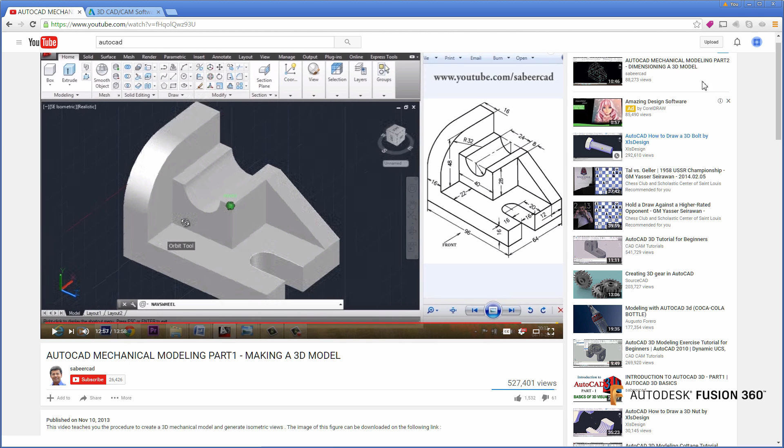So this is going to be a really nice apples to apples workflow of what you're probably familiar with if you're doing 3D AutoCAD right now, and then jumping back and creating it in Fusion. So if you want to see AutoCAD, watch this video. If you want to see mine on how we do it in Fusion, watch this.

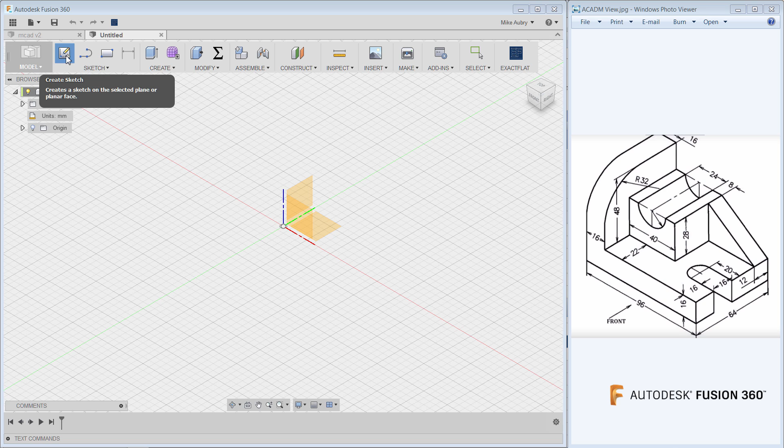I'm going to start from scratch on this by making a new design. The way we create 3D models in Fusion is we start off actually by making 2D sketches of the profiles we'd like to extrude. And so that's what this create sketch option is. We'll choose that, and then imagine like a piece of wax paper that sits on top of a table. We'll actually apply a sketch over top of one of these planes. Usually it's one of your origin planes that are shown here, your XY, your YZ.

I'll actually click and put that over top of the XY one. And then I'll just go to my top view. So there's your view cube like you'd have within AutoCAD. And we'll start creating our profiles. So the profiles are made with geometry that you're already familiar with coming from AutoCAD, things like your rectangles, your arcs. The iconography is very similar, if not exact, on many of these items. The way you apply them is slightly different.

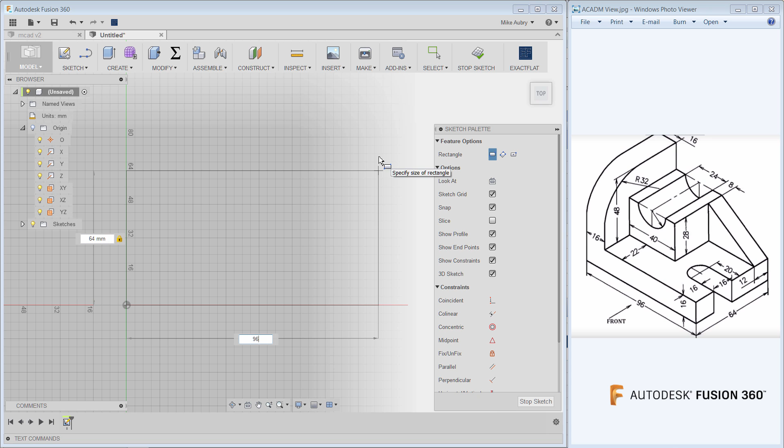We don't have a command line anymore, but a lot of that explicit entry style of creating geometry is still within Fusion. So for instance, if I go and start my rectangle here from the origin, good modeling best practice. Even though I don't have a command line, I can still be really precise from the get-go how big I want this rectangle to be. So I'll just say I'd like this to be 64 millimeters, hit the tab key, and make my horizontal geometry 96 millimeters, hit enter, and I have exactly the right size rectangle to start building from.

Another thing to notice is that it added the dimensions. So these dimensions are different than the common dimensions you'd see within AutoCAD. These are more analogous to what we'd call power dimensions in AutoCAD, in that they're parametric and you can drive the geometry from them. So if I go and make this thing 50 millimeters, notice how the geometry updates. If I go and put it back, everything moves.

This is super powerful. It makes editing so much easier. So as you get into Fusion, you'll really begin to love these dimensions, so definitely don't shy away from adding them. It's actually best practice to make sure you add dimensions to all of your geometry. As you're getting started, though, you can make highly accurate and precise models with or without dimensions.

Another way to do this is you can actually use your grid settings to make it so that the geometry is accurate to whatever you need it to be at. What you'll notice here is I have an adaptive grid. So as I zoom out, you'll notice that the increments are in 50 millimeters. As I zoom in, they get more and more precise. This is the default setting there.

So if I wanted something to be 16 millimeters off, if I just zoom in a little bit and go 5, 10, 15, 16, add a line. So here's 16, and you just move up. I don't need a dimension. I can just go and measure it, and we'll show that yeah, this is actually 16 millimeters apart.

So that's a really common way to model things up in AutoCAD. AutoCAD users like to know that their lines are aligned to where they want them to be from the get-go, and that's what this grid allows you to do. In addition to that, you've got trim and extend. Those are still options you have coming from AutoCAD. So here I'll trim these away, make it so it's in the right place.

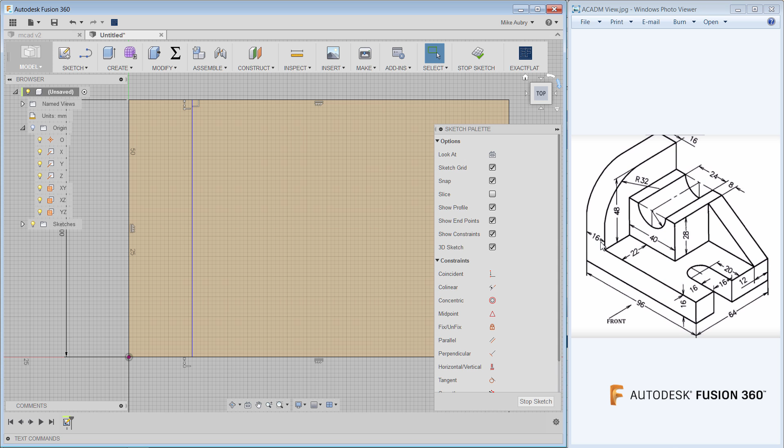In this case, a lot of the dimensions on this part are divisible by 4. So if the adaptive grid isn't doing it for you, what you can do is go in and change your grid settings. So that's what's right here. Go and change that from adaptive to fixed. And so I'll just go with my major being 16, my minor being 4. Then you can start adding other stuff. So like this 16 right here,

one of the things you'll notice is that it won't snap if you're hovering over a line. That's a little different from AutoCAD. It's really easy though. You just go in there and say, well, this is going to be 12. You move it a little bit past, hit escape, hit T. That's trim, and you're perfect. That's going to be 16 away. So it does feel a little different, but the basic foundation of how you create geometry hasn't really changed that much.

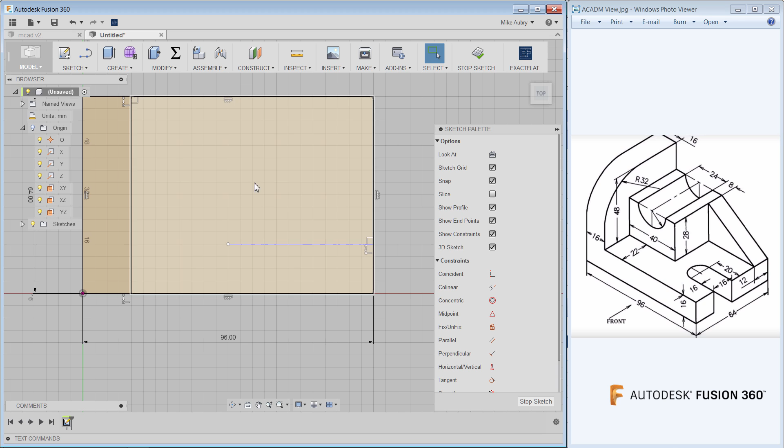As you get more familiar with the way Fusion thinks, you will gradually start to move away from using grids. You'll actually start just building geometry, and then you'll dimension it later. So let me show you where you'll get to. What I'm doing here is I'm just going to create some basic geometry, and then I'm going to dimension it later to see how it behaves. So I'll add just an arc here, and then I'll add a line.

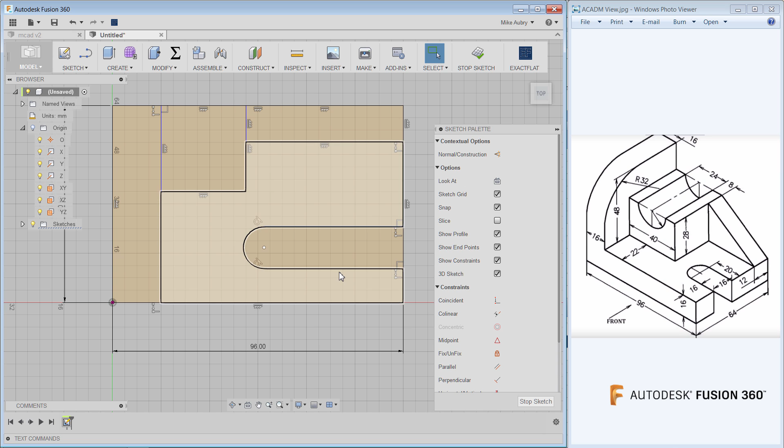And what I'm creating here is geometry that's not dimensioned, but it is constrained, and I'm choosing how I want the geometry to behave. That's what these little icons are. If I hover over, this is actually a horizontal constraint. This is a tangency constraint. Check this out. If I make a line here, that's that little horizontal constraint there. I can't move it, so it's horizontal. It's always horizontal. If I delete this, now I can move it.

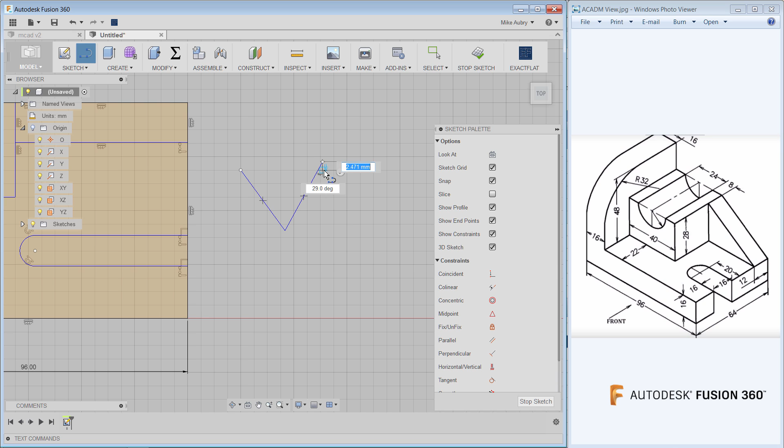If I move it here, and let's add another line, I can add a constraint. So there's no constraint right now other than that they're coincident, they're touching. But I can actually go in and say, I'd like this to be perpendicular to this line. And now I have an icon that shows that. So I can move it. And so these little constraints you have right here can determine how your geometry behaves.

And they're really powerful. It's a little bit more thought than what you'd sometimes have in your regular AutoCAD stuff. But what it gets you is when I add my dimensions, it makes things a lot more editable. So if I just add this one, we know this one's accurate, I already put it in the right place, but I can add this, which I know is wrong. But now when I make it 40, everything updates the way I would expect it to. It's behaving the way I want it to. I can say I'd like this to be 22 offset.

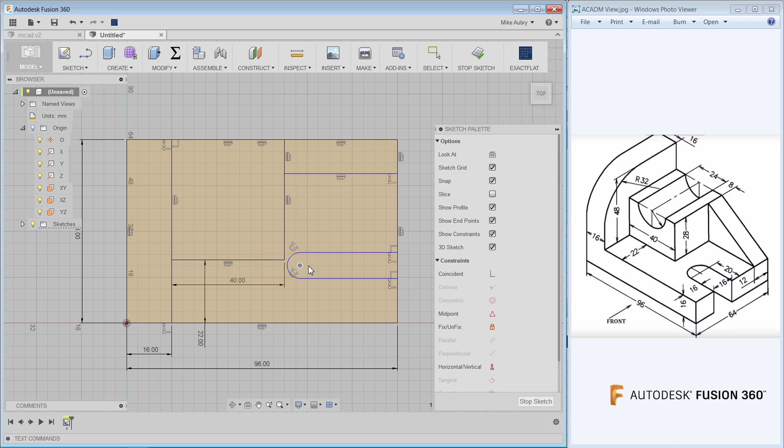Behaves great. I'm going to move this little friend over here. We'll say this is going to be 16. And we'll say this is going to be 16. And this distance is one that's 20. See how you can really get going on this stuff really fast. It doesn't take long. And we'll say this is from here to here. That's 12. And before you know it, we've got a nice foundation that we can start creating our model from.

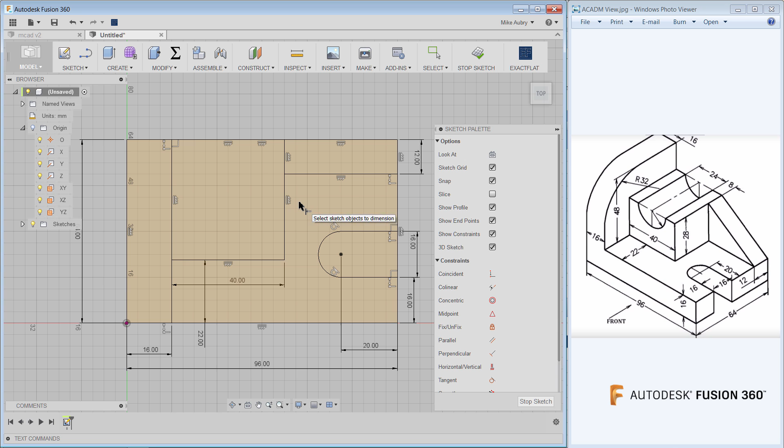So the next thing we need to do is add some depth to it. We need to make it 3D. And so what I'll do is I'll go back to my home view, and we'll extrude them out. And so the extrusion is actually what we call a feature. There's a whole bunch of different options to create geometry. That's what this extrude is.

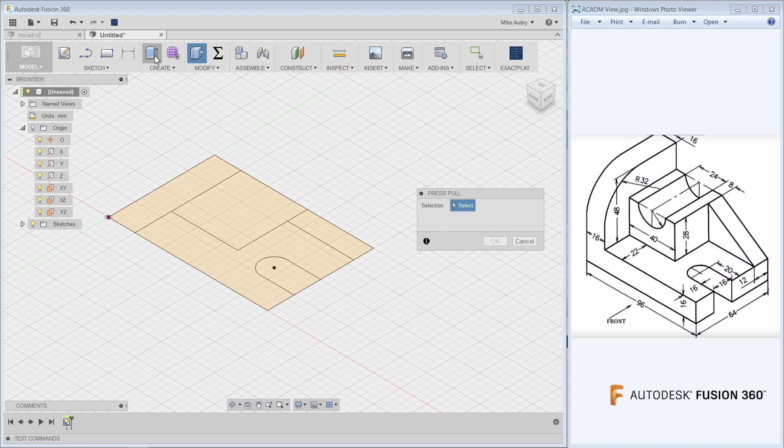I want to show you another tool here. It's actually called press pull, which actually merges a couple of these different creation tools that we have. So what we'll do here with this press pull is it'll actually do the extrude for us, and then we'll use it later actually to make a fillet. It's a nice kind of general all-purpose tool, really handy.

So as I'm extruding out this what looks like an H, I need this thing to be 16 tall. It's actually going on increments of 5. If I zoom in a little bit, I can make it so it'll go, and now it's going in 1. So that's actually the snaps that's going in as a function of how far you're zoomed in. So now we're at 16. That's perfect. And now I have my H, and the sketch disappears.

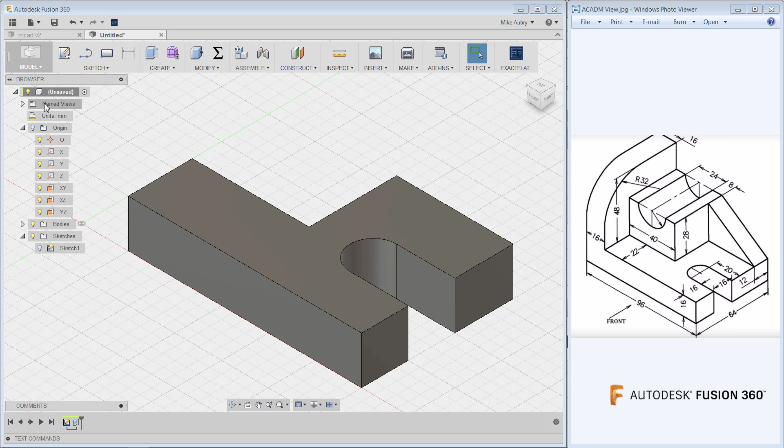That's no big deal because we can go into our folder here and just turn it back on. So much like the same way AutoCAD uses layers, we use the same light bulb to talk about visibility for the various things you'd have over here in our browser. So we'll go and turn back on the sketch, and we'll just create the rest of our features.

So we'll extrude out these profiles here. I'll just go in and use that same press pull again. Choose U and U. And these are going to go up to a distance of 16 plus this 28. So I'm actually going to write that in right here. 16 plus 28 millimeters. And you'll see that now it's all the same part.

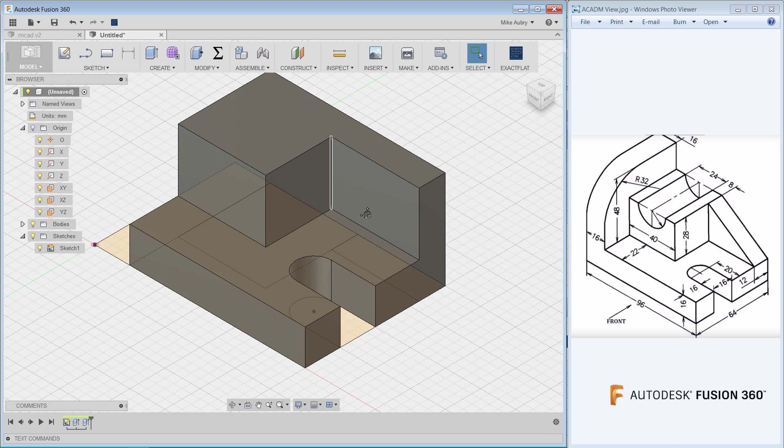And I'll just take this as well. I'll right click and repeat the process, that repeat press pull. If you just right click, it's always right there anyway. Move this up again. This is a little bit higher. So it's going to be 16 plus 48. And there's our pieces. And let me turn off that sketch so we can just see it. And we're on our way.

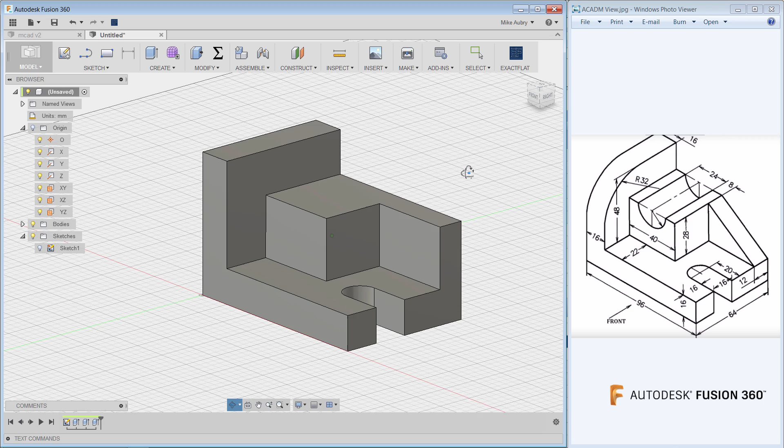So we still need a couple of things here. We need the fillet, and we need this chamfer here. So there's a couple ways to create these. The fillet's really easy. If you choose this edge here, remember that press pull, you can use that to make fillets as well. So I'll just create this and then pull it in. This is going to be a 32, so we'll actually call it that, 32. And it creates a fillet for us.

And then to create this shape, I can create a cross-section sketch, or I can do a chamfer. Let me show it both ways. If I choose this edge right here, press pull is going to want to make a fillet, but actually you can make a chamfer right here just by hovering down here. It's not going to be an equal distance one. That's not going to get us what we want. So what we actually want to do is a distance plus angle. So we'll go out to this surface here, and then we'll bump this up, and that's looking pretty good at 35. So that's one way to create it.

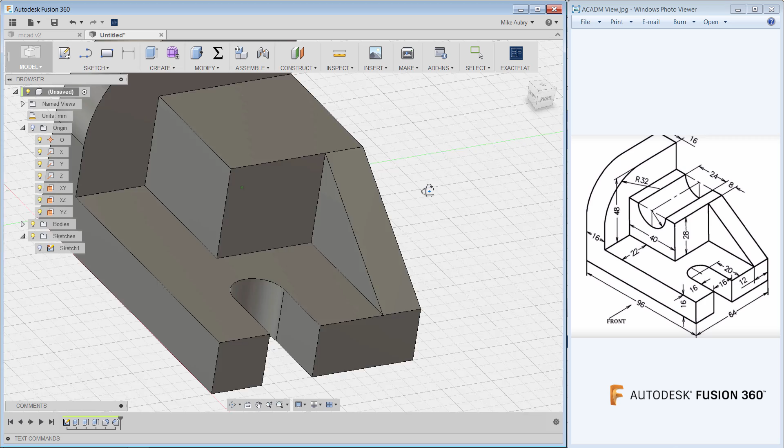The other way to do it, if I undo my chamfer, so there's undo, Control Z, Control Y, or undo and redo, by the way. The other way you can do it is you can go and create a new sketch on this plane right here. And so we're talking about these wax paper. Now I'm actually going to put it on this face. This is pretty handy. You just go on here, and then make a line.

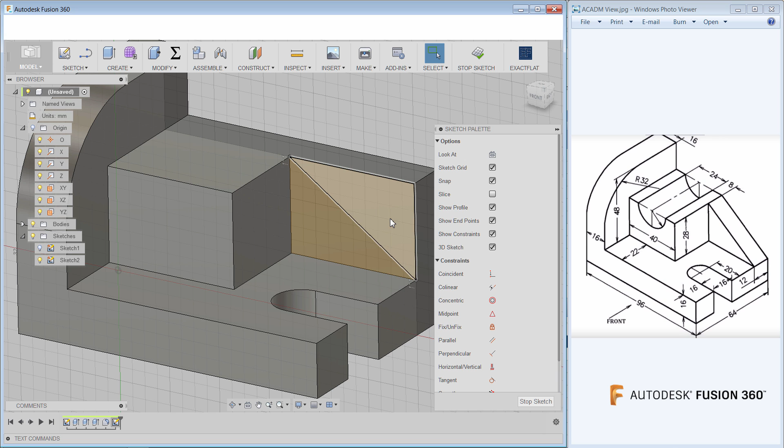Just kind of click on this point to this point, and then extrude it. Just get rid of it. Let's just say this way, and you can see that we're creating. In this case, the red says we're taking away. So that's another great way to do that shape.

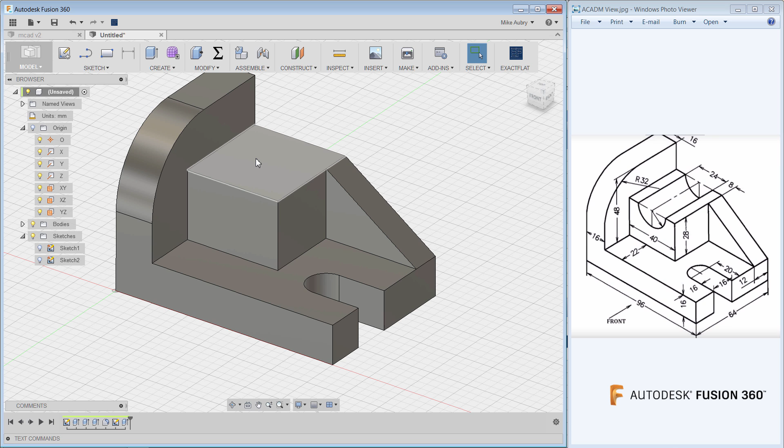To make this hole, we do need to make a sketch on top of here, or we can make a circle here. It's kind of your choice wherever you want it to be. I showed you extrude, so instead of extruding a hole, let's show you revolve here. I'll create a sketch on top of this face right here, and we'll get to a nice overhead view. Down here, you still have your look at, your pan, tabs, all these things. So look at this face. It's a handy way to do it.

And I will snap it to that midpoint. You see that triangle that appears? There's a midpoint from there. And then I want to make a line right here. That distance is going to be, where is that radius? It's going to be 24, so 12. So dimension, by the way, D is your hotkey for dimension.

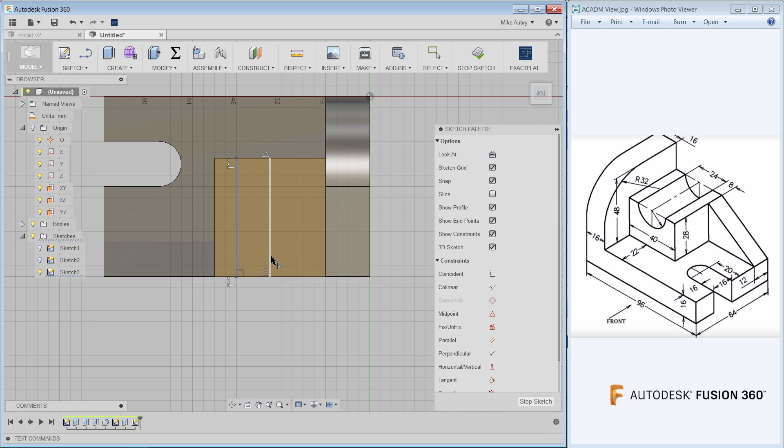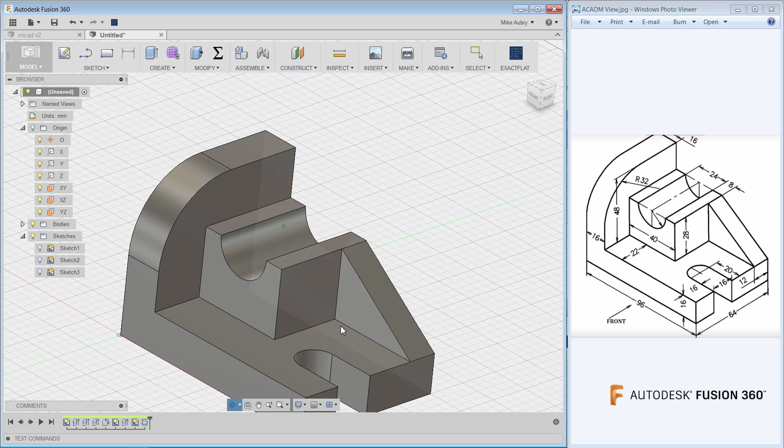Here's 12. Stop my sketch, go back out, and then we're going to use this profile. Actually, under create, there's an option to make a revolve. We'll choose that. So we got this profile here. I'm going to choose my axis as this. See that nice little preview of what it's going to do? And we've got a really nice looking part.

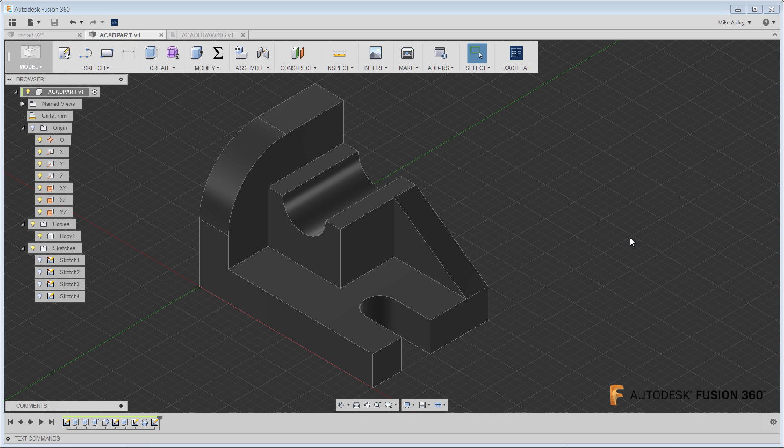Another question I get from AutoCAD users is asking, can you make it look a little bit more like the AutoCAD modeling space? And that's actually under your display settings, under your environment. If you go to dark sky, I hate this, by the way, so if you ask me and you're in dark sky mode, I'm not going to help you. But if you want to have the black background, that's it. And then, yeah, have fun with that. Anyway, that's the black background.

But yeah, if you'll notice, most of our tutorials and a lot of our support documentation, our standard is photo booth. So that's the one that you'll want to be in if you want to be like the way a lot of the tutorials and stuff are set up. Just get used to using photo booth. It's not that bad.

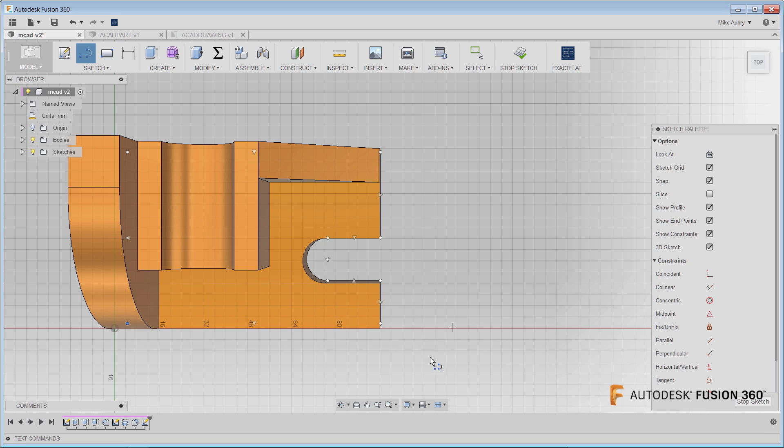The next thing I want to share with you before we go is a couple of extra power tools that I think are really handy for people coming from AutoCAD. The first one is I'd be remiss if I didn't tell you about the S key. So what the S key does is if you're really missing your command line about now, if I hit the S key, you'll notice there's an option here to look up different tools that you have at your disposal. So like if I don't know where the rectangle is, I can just write in rectangle, and there's the option. I can say, oh, there's my 2-point, thank you. So I'll go from here to there, and that's exactly what I was looking for.

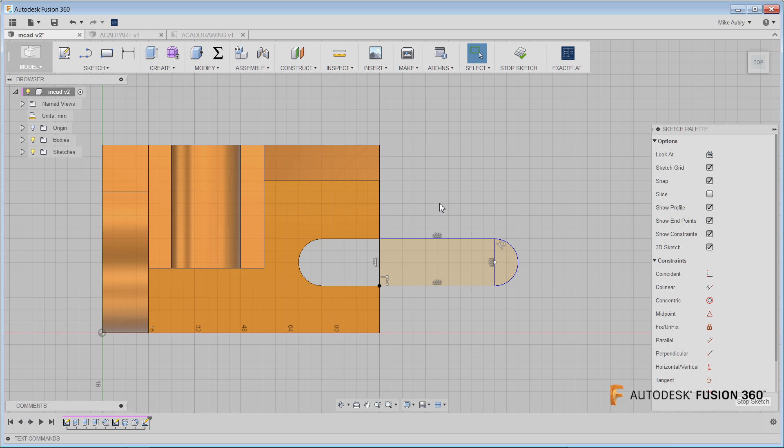If I hit the S key again and say I don't know where the arc is, there's my 3-point arc. It's great. All that is just right there. S key, project, where's that? So I can project these surfaces. So I'll pull it in. Now I've got my profiles. Everything that you have in your sketch, your create, your modify is all at your disposal within this S key. Furthermore, it can be customized if you're always using the same things over again.

So say I'm doing a lot of slots, I can actually make it so that this overall slot is just part of my S key. So then I go back and say, man, I really need to have a slot right here. You just hit S key, slot, and there's your slot. If you haven't made a slot in 2 weeks, no big deal. You just drag it and remove it. So you can customize, build these things up, drag them down as you don't need them. It's all right there, and it's a really efficient part of the tool, and you're going to find a lot of similarities between that and the way a lot of you probably were using the command line anyway.

Final tip for you before we keep building stuff here is the way we select things. Crosses and windows. That's a very AutoCAD thing. Notice how we go upper left, lower right. It's red. Upper right, lower left. It's green with some hashes on it. That determines what gets selected. So if I go this way, everything that's 100% within that box gets selected. It's only the arc. Nothing else gets selected.

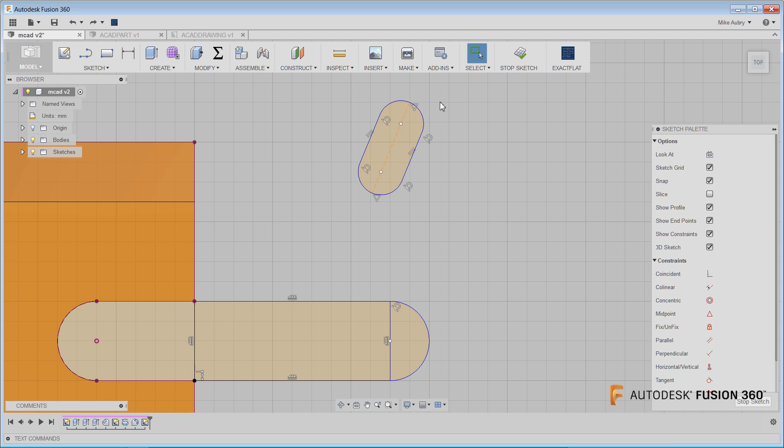If I go this way though, it selects the profile, the lines, everything. If I delete that, the only thing that survived was this because it wasn't touching that original box. So as you select things, use that, because you're probably already familiar with how that works coming from AutoCAD. So here I'll just delete that and we'll move on.

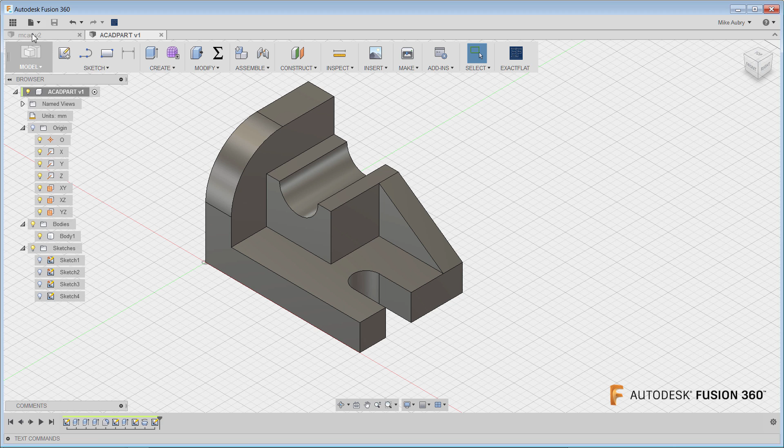So now that we have our 3D part modeled up, the next thing to do is get 2D documentation from it. So we differentiate in the Fusion environment between our Fusion models and our drawings. It's similar to the way AutoCAD would call it paper space and modeling space. And so what we'll do here is I've saved my part. I went ahead and hit save. And I'm going to now create a new drawing from design.

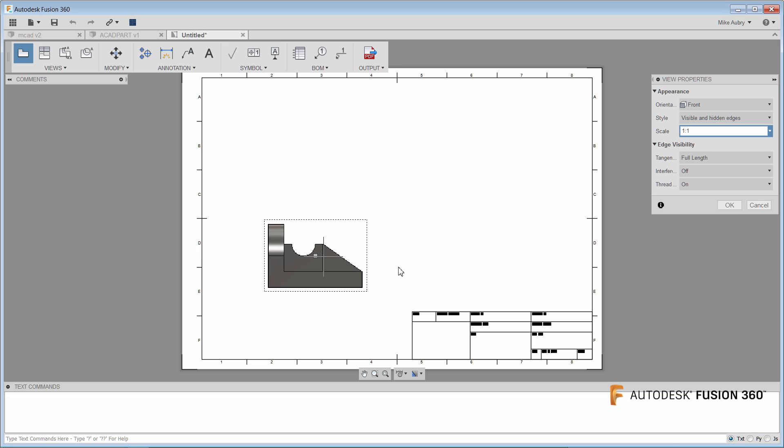So I'll choose my standard, my units, and then we'll pull in this F3D file and create our views from it. So here's our paper space. We'll go and choose what the scale is going to be, say 1:1, turn our tangency on, and then there's our base view. And then we'll go and we'll make our projected views. So you just go and click this view, and then go and choose. You can choose your top view, side view. Here's an ISO view you just get for free.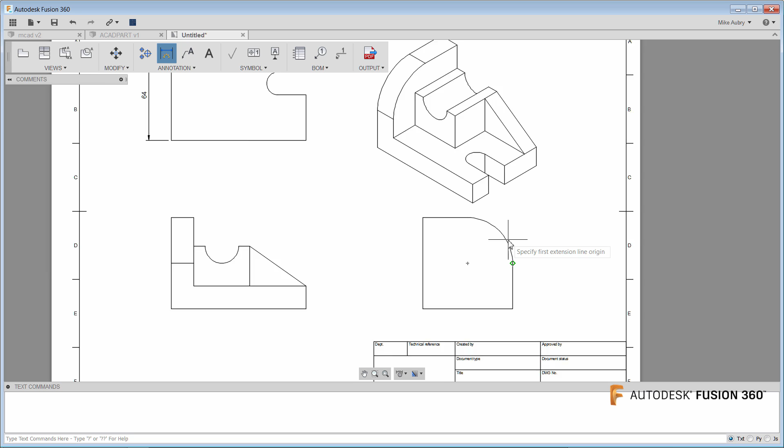Back into this and turn off my hidden lines. Turn it back just to visible. Really easy to update. But let me show you what we do. I mean, the big thing is your dimensions. They're pretty easy to do. We just go in and then there's one. There's the radius in this.

If you want to do things like baseline dimensions, we support that. So like there's our base. Choose your baseline dimension. Go here, here, here, here. Pull this down a little bit. Angular dimensions, you just go and choose, here's an edge, and there's your specified angular dimension.

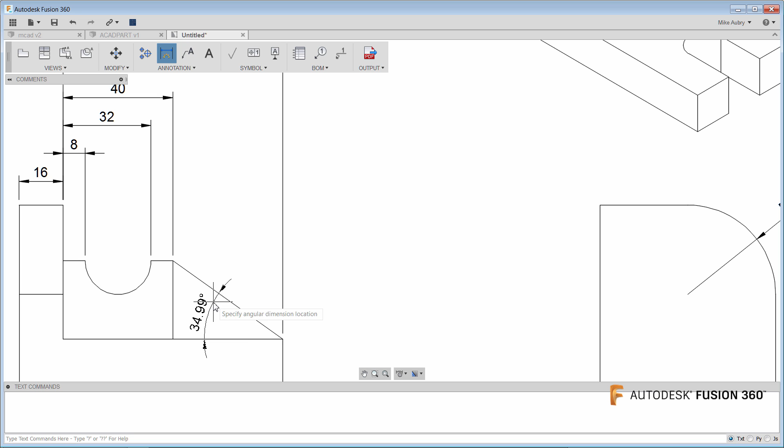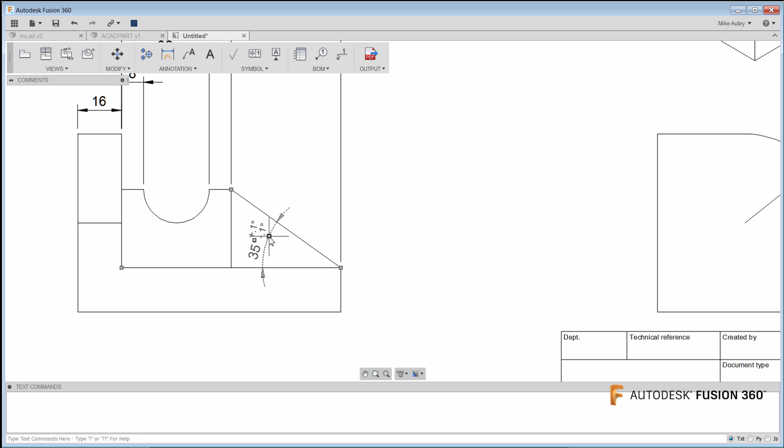You can choose your tolerances, these things. So we go and actually choose, this is going primary. You go down to 1, you can go all the way out to 4, you're way out there. If they actually want to say a deviation of this, plus or minus a degree, you can call that stuff out. So that's all there. There we are. You also have the options for things like section views, detail views, all that stuff's in there.

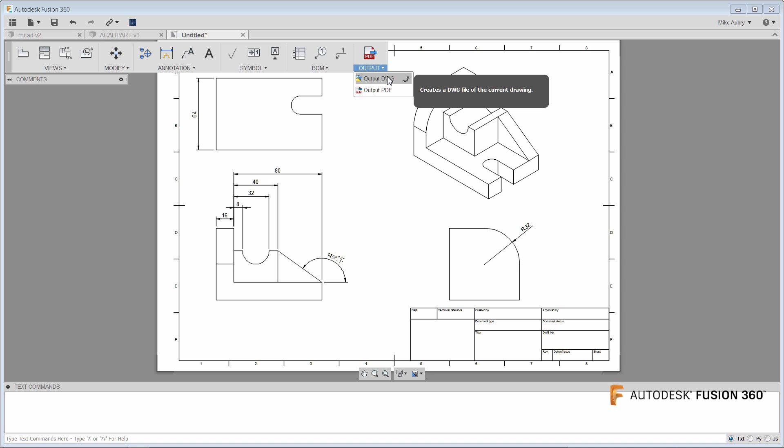What we don't have yet, in all irony, is we do not have 3D annotations yet. That's something that'll come in the future. But when you're done, you're ready to send this thing out. You can output it either as a PDF, send it to somebody, or you can output it as a DWG. It goes out to AutoCAD 2013 format, and that's your 2D environment.

My hunch is at this point you're probably feeling a tad overwhelmed. That's fine. That is very common. There is definitely more for you to learn. The final thing I want you to do before we break is make sure you guys know where to get help. There's a couple places to go. The first one is the Learn Fusion 360 option here.

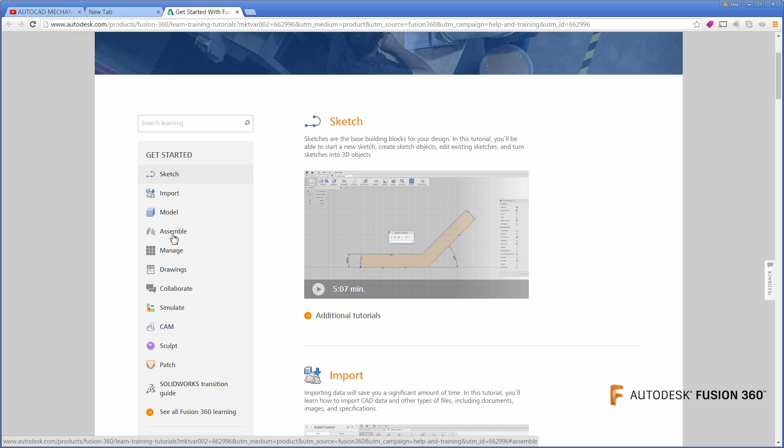This button right here. We pumped a lot of time into coming up with some really intuitive getting started activities based on what it is you're trying to do, whether you're trying to sketch stuff, get in geometry from different CAD tools, modeling, assembly, how you manage files. There's a lot of different steps right here to help you guys get started with Fusion. They're general in nature, but they are good. Let us know what you think. That's the first area I want you guys to know.

The other one is, as you're getting started, use the getting started option here. This should have been turned on by default when you first started off. If you've turned it off, maybe turn it back on, because this has a lot of the quick things about how do you change your units? How do you set things up to be on defaults from some common CAD tools? Basically everything except AutoCAD, in all irony. But basically what's pan, what's zoom, what's orbit, and then some ways to just start creating. This will also help you out.

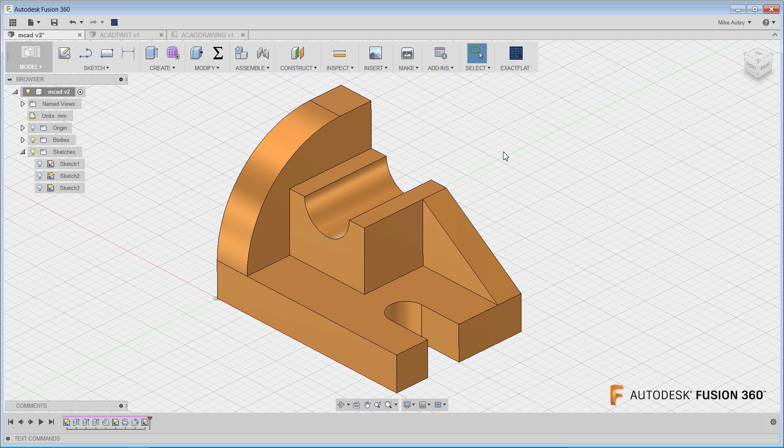So with that, everyone, I hope this was really valuable to help you get started in coming from AutoCAD using Fusion. I had a lot longer list than this of things that I've found similar between the different environments, but I decided just to focus in on the sketching side of things, and I hope it was valuable for you.